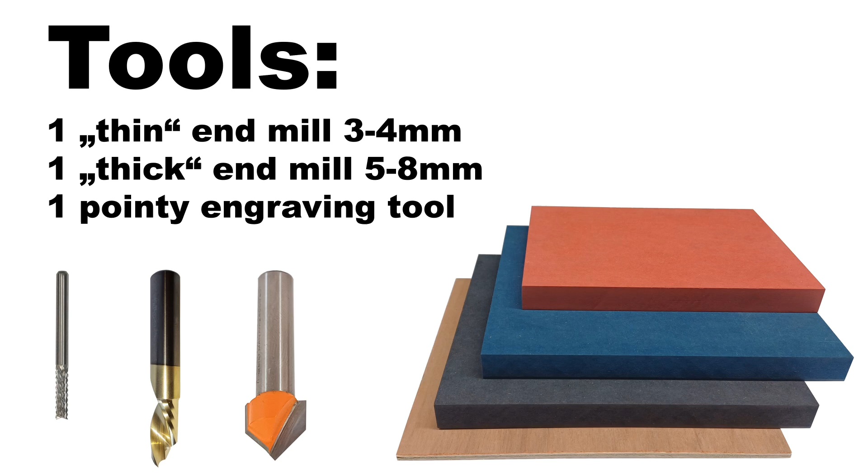Regarding end mills you need a thin one with about 3 to 4 mm diameter, a thicker one with about 5 to 8 mm, and a pointy engraving tool. The tool type isn't important for this project. And optionally, 8 magnets, 4 felt pads, sanding paper, superglue, paint and clear lacquer.

After downloading and extracting the zip file, we can get started. Start Estlcam, select menu File, Open, and open tokens.dxf. Estlcam will then ask about the length unit of this file, select millimeter and confirm. At the top you will find the tool list.

And before we can start, we first need to add the tool we are going to use to the list. At the moment there's only an example tool. We click on the empty line below to create a new tool and give it a name in the name column. I will call it Endmill 3.175 mm.

Actually you can choose whatever name you want, but it should make some sense to avoid confusion when we use more tools later. However, don't use brackets, they have a special meaning in Estlcam. If you like to know more about it, let the mouse rest at a header and Estlcam will display a tooltip with explanation. And with this, we will take a short detour to Estlcam's help function.

Estlcam is full of those tooltip windows that pop up if the mouse rests above something. This is Estlcam's main source of help and instruction and explains every function shortly but completely. Some also contain links to videos or websites offering further information. However, you need to keep Shift key pressed to be able to click those links. Otherwise the tooltip will avoid the mouse pointer and close itself before the link can be reached.

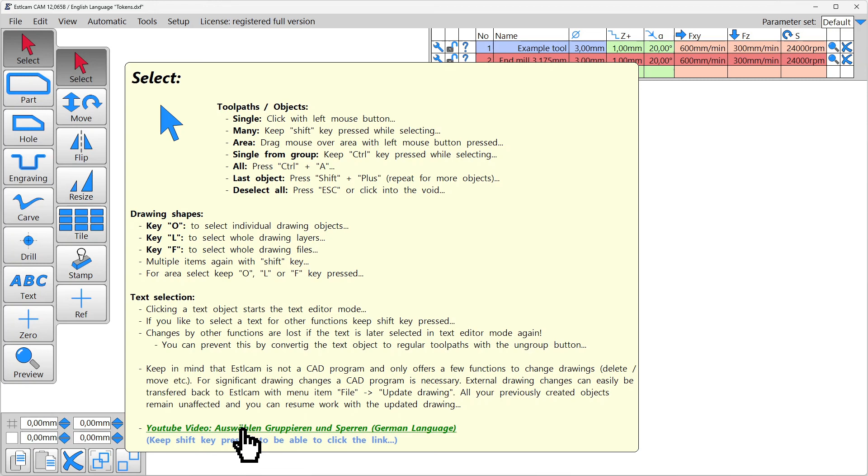It is a good idea to deliberately read a few of those tooltips every now and then. They contain many tips that will make work easier and cannot be found anywhere else. However, the tooltips get annoying over time. Click Menu Setup, Basic Settings, and check the Show help only if F1 key pressed option. Now the tooltips won't pop up automatically anymore, but you can still make them appear by pressing F1 key.

Okay, back to the tool list. Next to the name we enter tool diameter. Mine has 3.175 mm or 1/8 of an inch. It does not matter if we use a 3.0, 3 point whatever or 4 mm tool. But one tip for beginners, avoid very thin and very thick tools. 1 or 2 mm end mills break very easily, while 20 mm tools on the other hand are expensive and very destructive in case anything goes wrong.

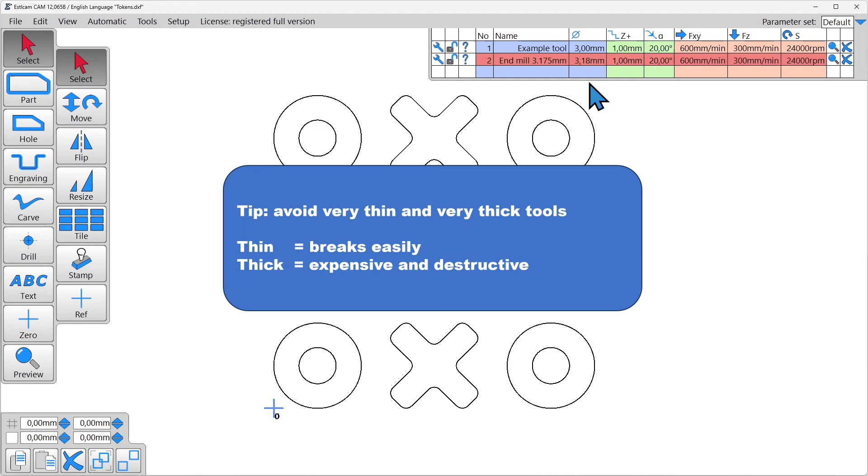The columns Z+, depth per pass, FXY, feed rate, FZ, plunge feed rate, and S, spindle speed, are generally referred to as cutting data. This is a topic we can only scratch at the surface. There are thick table books for reference, online calculators, and many tool manufacturers also provide guidelines for different materials.

And depending on tool and material, you will have more or less leeway regarding the cutting parameters. Some materials like for example aluminum or acrylic glass are very picky and can only be machined with very specific tools within very specific cutting conditions. Otherwise the tool will break or the cut quality is bad.

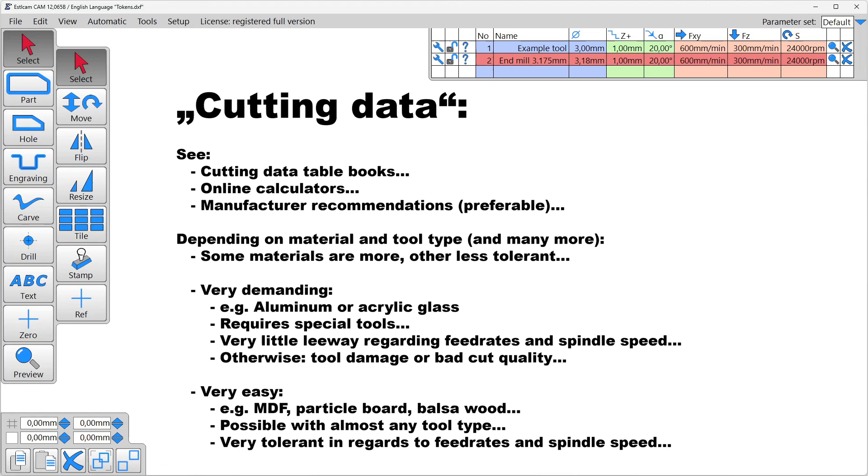Other materials like, for example, MDF or particle board are very tolerant and can be machined with almost any tool at mostly any feed rate or spindle speed. This is the reason why I've chosen MDF for our tutorial. It makes life easy. And this is the most important tip at the beginning: keep things simple and choose easy to machine materials so you don't have to worry about too many things at the same time. Okay, let's have a quick look at those 4 parameters.

Column Z plus, depth per pass. Our material has a thickness of 19 mm, and even though MDF is very easy to machine, the tool still would not survive if we try to cut 19 mm all at once. Instead, we will machine in multiple passes, and this value sets the maximum depth increment of each pass. I will use 3 mm. We could use significantly more, but I don't want to make it a challenge for weak machines.

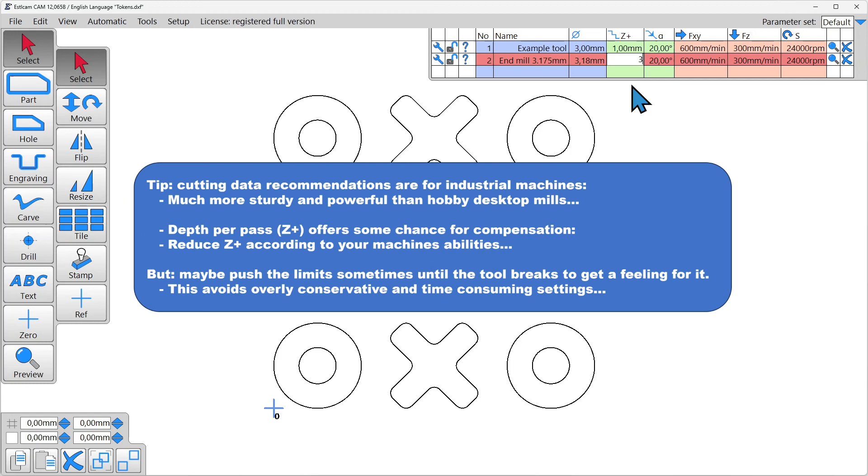And this is also a very important thing to know. Official cutting parameters assume a very sturdy and powerful industrial machine that cannot be compared to a hobby desktop mill. And depth per pass is the one parameter where you have the best chances of achieving some compensation by reducing the value to match the machine's abilities. But on the other side, a small end mill like this does not cost much. And sometimes it can be interesting and useful to intentionally push the values until the tool breaks, just to get a feeling for it and avoid overly conservative and time-consuming settings.

Column FXY is the feed rate, or the speed at which the tool travels through the material. For MDF it doesn't matter much if the machine travels at 100 or 5000 mm per minute. We mainly focus on what the machine can do without going anywhere near the limits. If you have no idea at the moment, just enter 500, but if you're sure your machine can do it, 3000 is also totally fine. Column FZ is the plunge feed rate, basically the same as regular feed rate, but for situations where the tool plunges deeper into the material. Many materials require reduced feed rates for this, but MDF doesn't care and we can use the same value.

Finally, spindle speed. I will enter 24,000, which is the maximum my spindle motor can do. This column is only relevant if you have an electronically controlled spindle motor. If your motor is controlled manually or has no speed control at all, this column can be ignored.

And one final thing about the tool list. It has 2 parts: the list view, giving you a quick but basic overview of all your tools, and a detail view for each tool that you can access by clicking the wrench symbol. Here we can customize many more properties, but for most simple projects the list view is just fine. But as we are already here, you can check the rounded holding tabs option, and then we close the window by clicking the OK button.

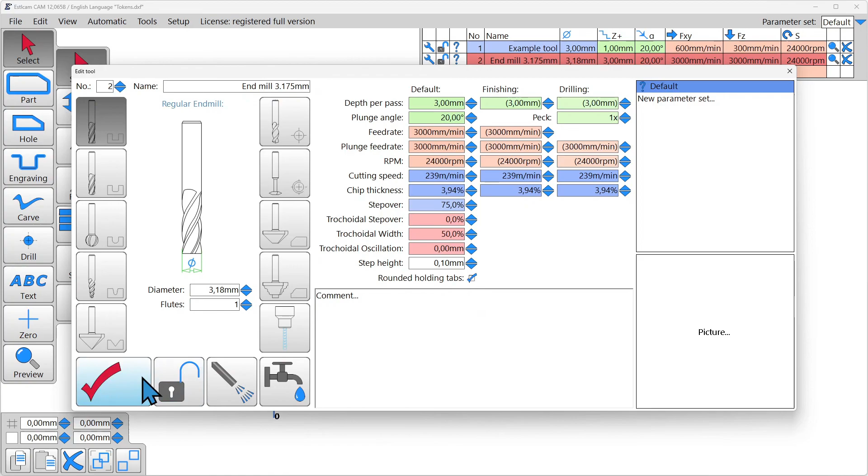Now let us have a quick look at the mouse functions. If you keep the right mouse button pressed, you can pan the view, the mouse wheel zooms, and a double click brings you back to a view where the whole drawing is visible.

Okay, our just created tool is highlighted red and therefore selected to create new objects. Now we enable the part function to create the outer shapes of our game tokens. As soon as the mouse pointer gets close to a drawing shape, it will be highlighted green. And when we click, the part function creates a new toolpath around the outside of our selected shape. The counterpart to this is the hole function, which can be used to create a new toolpath along the inside of a shape. Now we have created one X and one O, and we will ignore the other tokens for now, because we actually have a little problem that we should take care of first.

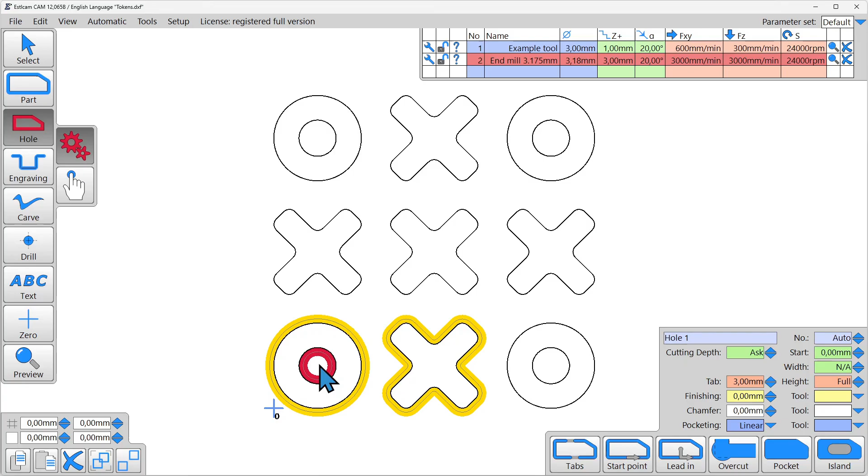If we machine our tokens this way, they will be cut out completely and just lay around loosely. Sounds good, but is bad. If we do it this way, the tool may catch the part and this can happen. If you're lucky, the part is just more or less damaged. If you're unlucky, the tool breaks. So machining the part completely is not a good idea if the workpiece is just held by clamps. There are alternatives like vacuum clamping or double-sided tape, but we will do something different.

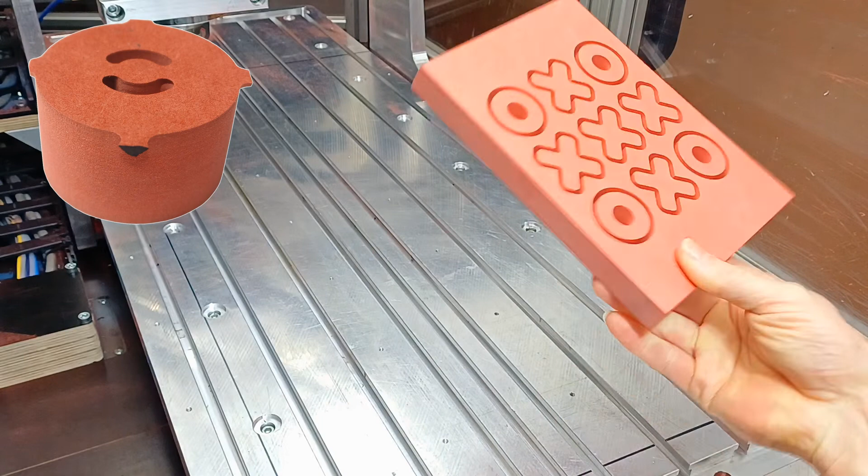We will keep the tokens connected to the board by small tabs. It adds some manual work at the end, as we need to cut those tabs and sand them down, but this is far better than risking damage to the tokens or tool. For this we select all objects we created so far: enable the select function, keep the left mouse button pressed and drag it over the parts. Alternatively, you can use the keyboard shortcut Ctrl A to select them all. Then we enable the tabs function and click where we want to create the holding tabs.

Here to the right in the Objects Properties section, we can adjust tab length in this field. Let's set it to 8. And tab height in the field right next to it. Let's set it to 4.

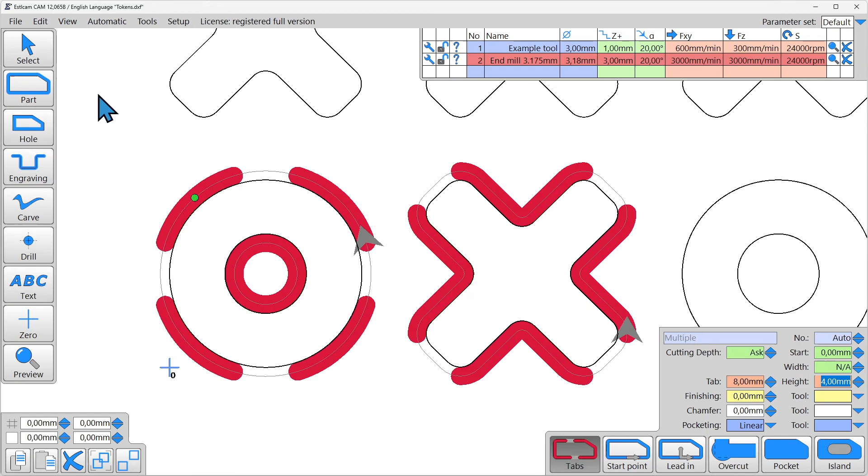The little piece inside the O can also cause trouble and jam the tool, but adding tabs here is a bit tedious. They would be rather hard to remove as everything is so tight here. So let's prevent this little pin altogether. Enable the select function again, click on the cutout and delete it by pressing the delete key. Then go to the drill button, enable helical drill and click the inside of the O again. Now the inside is cleared completely with no remaining pin to worry about.

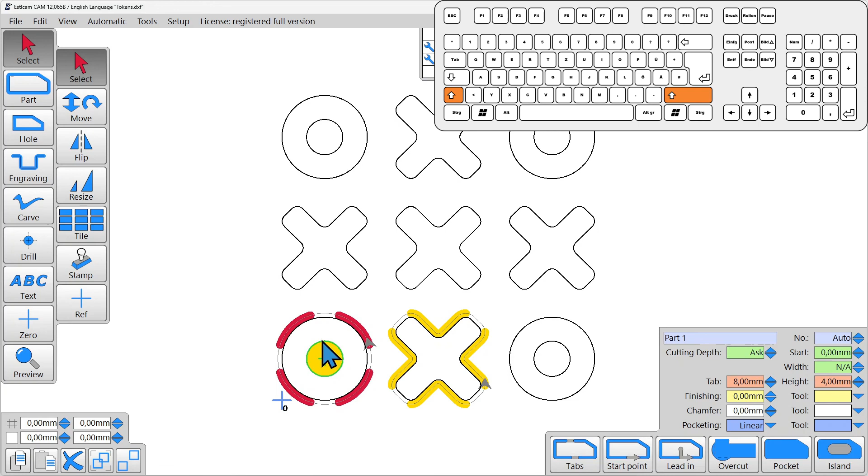Okay, now we have 7 more tokens and we could just repeat the previous steps, but I'm lazy and as the remaining parts are identical copies, we can use a shortcut. Enable the select function, keep shift key pressed for multi-selection and select the outer and inner toolpaths of our O. Then switch to the stamp function and just drop the O by clicking here, here and here. Then we go back to the select function, select the X, then again the stamp function and stamp it where we want it to be.

The tokens are finished, but one important thing still needs to be done. We need to select a workpiece 0. You can later fix the workpiece anywhere within the working area of the machine, but the machine has no eyes and you somehow need to show it where your workpiece actually is. For this we use the workpiece 0 point and it works this way. You select a distinctive feature of your workpiece. Very distinctive is the left front corner at the top of the workpiece.

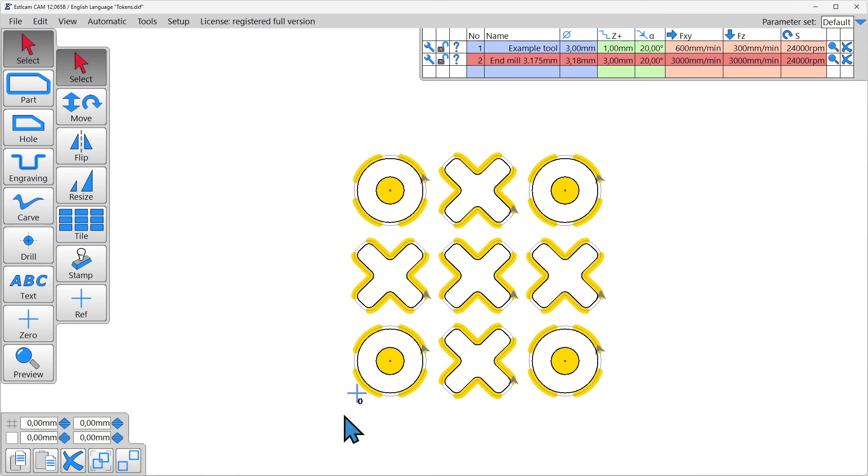The other corners are basically equally distinctive, but left front top is tradition, well visible from the front and suitable for most applications. And Estlcam offers special functions for this corner, so whenever possible you should choose the front left corner. And later we will just move the machine so the tool rests directly above this corner. And then we just tell the machine, now you are at workpiece 0, and so the machine knows where the workpiece is. The virtual counterpart of our corner in the CAM is the blue cross here. And this can be moved to whatever location you like with the 0 function.

Our board has a size of 200 by 150 mm. We enter those values in the workspace fields. And now Estlcam displays a rectangle of this size representing our board. Then we click the 0 function, click center, and now our blue 0 cross is set so that all of our tokens are perfectly centered inside the 200 by 150 mm board.

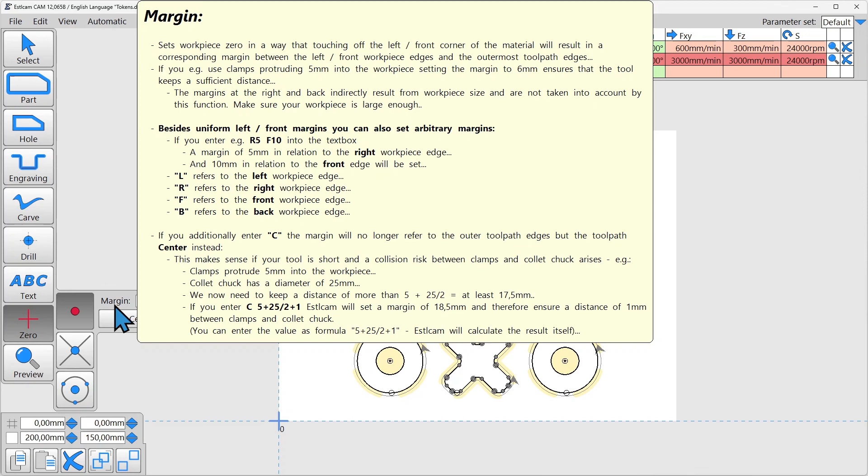Okay, now the CAM part of our tokens is finally finished and we can create a CNC program. Select menu File, Save CNC Program. If you do this for the first time, Estlcam will ask you about the control software you are using. Each controller has its own expectations regarding CNC programs, and this step is necessary so you get a compatible CNC program for your controller. If you have no controller yet, or just like to play around, select Estlcam Default and click OK. This dialog only appears once, and if you later like to change your preset, click menu Setup, CNC Programs, Post Processor.

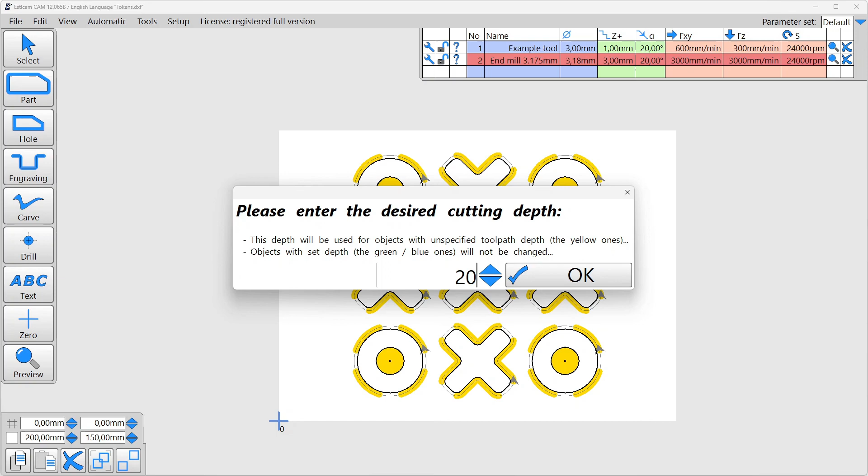Now you need to select where you'd like to save your CNC program. And finally, Estlcam will ask how deep you'd like to cut, because we never specified this. Our board is 19mm thick, but we will not use 19mm, but instead a little more, for example 20mm. This will ensure our workpiece is cut out completely, even if the material is a little thicker than expected, or the machine bed not perfectly leveled.

As soon as we click OK, Estlcam creates our CNC program and shows a preview. You can rotate the view by holding the left mouse button down, and double clicks will show the default views: top, ISO and side. There's also a simulation you can start here and accelerate or decelerate with the buttons right next to it. Then click OK and Estlcam closes the preview.

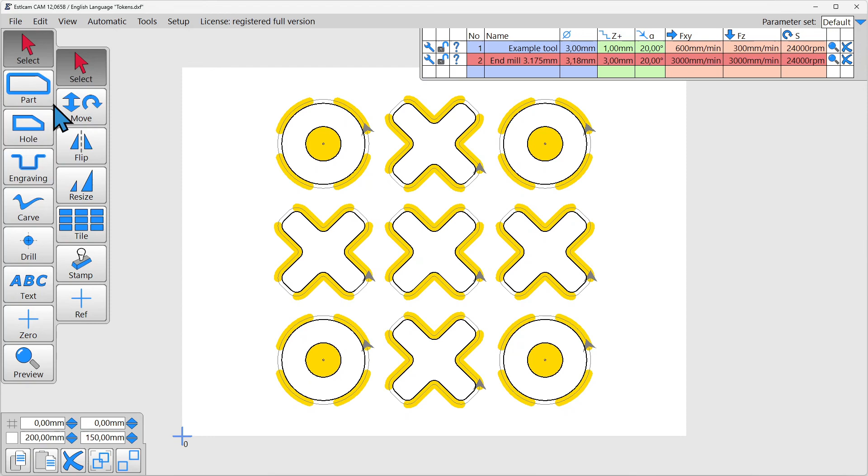One final thing before we go to the machine. We should also save our work as a project file using menu File, Save Project. The CNC program file we just created only contains the bare commands to control the machine, but no drawing, no tool definitions, and not the objects themselves with all their properties. This is only saved in the E12 project file, and if you later want to change something, you need the project file, do the changes, and then create a new updated CNC program from there.

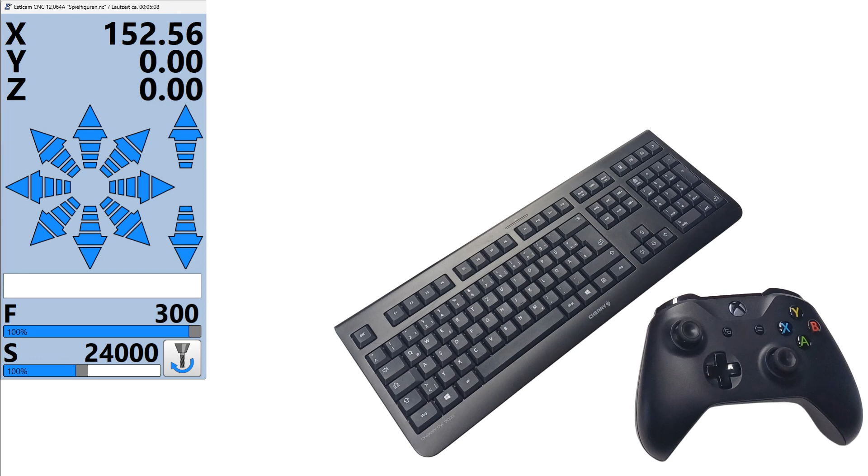You can control the machine with the mouse control cross, keyboard, gamepad, or handwheel. We won't go into details, but let's have a short look at each option. The arrows of the mouse control cross are split into segments to control the speed. If you click this arrow at the base, the machine will move slowly to the right. If you click it in the center, the machine will move at a medium speed. And if you click the tip, the machine will go as fast as possible.

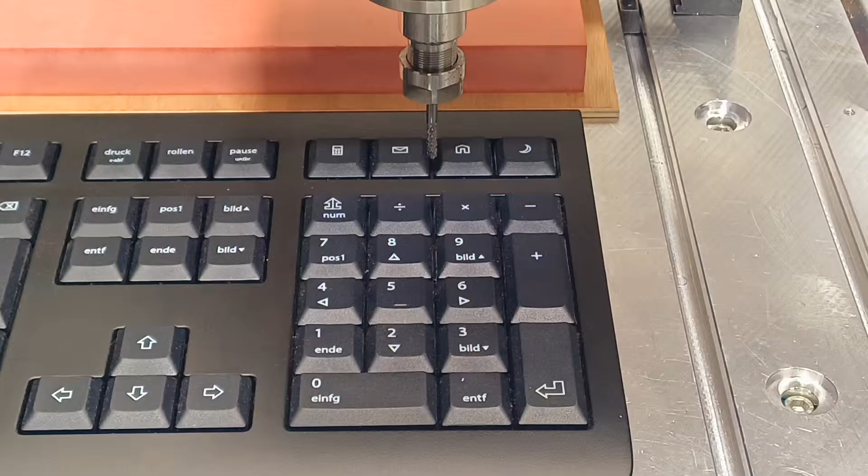Keyboard control is enabled and disabled by the keyboard button, or by pressing the num lock key. You can then control the machine with the number pad. The keys up here select the speed level: slow, medium, fast. Let's select medium. Left, right, to the back, to the front, up and down. Let's change to fast, and there we go. Tip: keyboard control is disabled automatically in some situations, for example if you enter a text or number field. This is necessary to prevent unintended movements when typing.

Gamepads are a really good option to control the machine. The right joystick controls X and Y, and the left one Z. The joysticks on their own are limited to a low speed range to allow for precise motions. For fast moves, you also need to keep one of the triggers pressed.

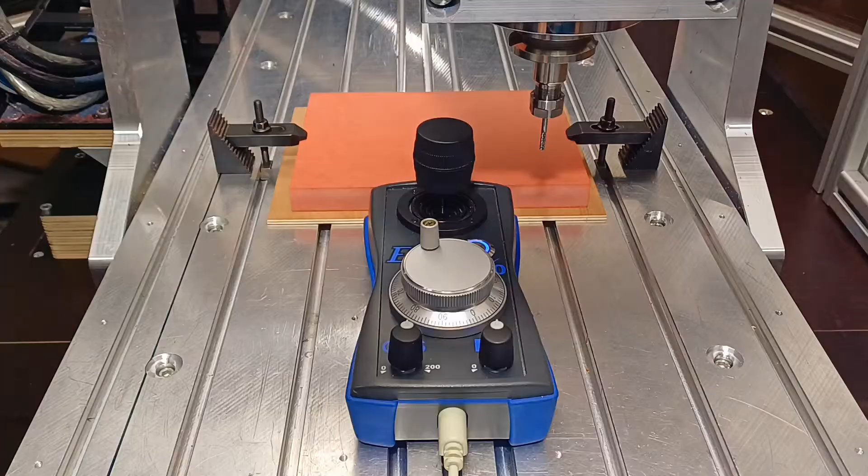And finally, the handwheel. The joystick controls all axes from very slow and precise up to full speed. The Z axis is moved by twisting the control stick. And the axis last moved by the joystick, or any other method, is then automatically connected to the handwheel encoder, which offers very precise control. The handwheel encoder is really great and useful to touch edges and surfaces without risk of overshooting and breaking the tool.

But Estlcam compatible handwheels are, to be honest, not exactly cheap and at least at the moment also hard to get. One alternative is the mouse wheel. The mouse wheel will also connect itself to the previously moved axis and also offers a sensitive and very controlled method of moving the machine. Tip: if the machine does not react to the mouse wheel, the mouse pointer is currently above a control with higher priority, for example a scroll bar. Make sure the mouse pointer rests at a neutral control, for example the preview area.

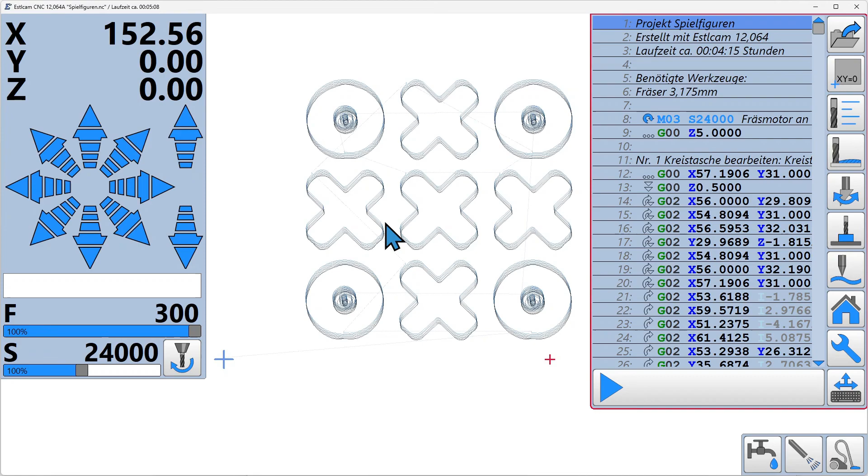Okay, now we can fix our workpiece on the machine, but don't forget to put a piece of scrap wood below it. We will machine 20 mm deep through just 19 mm thick material, and if there is no piece of scrap wood below the workpiece, the machine table will be damaged. It does not matter where you put the workpiece, as long as the tool is able to reach any location it needs to reach. Let us assume our tool can only move inside this line and is not able to go any further to the left or to the front.

Now, we obviously can't put our workpiece here, because our tool won't be able to machine in this area. But we also should keep at least half tool diameter distance to the line. It won't matter for this project, but in some cases the tool needs to be able to travel around the workpiece, and then the tool would need to go significantly further to the left than possible, even though the workpiece itself is still inside the work area. It can be useful to mark the limits of the working area with a pen.

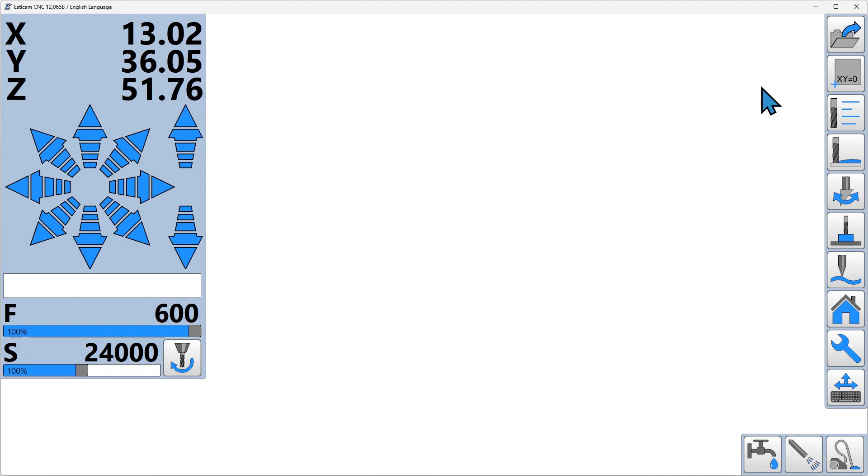Okay, we have a piece of scrap wood below the workpiece and it is tightly secured by two clamps. We open the CNC controller window, click the button at the top and open our CNC program. The list with the CNC commands can be resized with the mouse if necessary, and the preview in the CNC controller window behaves similar to the simulation. Double-clicking selects one of the default views, pressed left mouse button rotates the view freely, mouse wheel zooms, and right mouse button pans.

And now we determine our workpiece 0. For this we move the tool roughly centered above the left front corner, and then down until it touches the surface. Of course we have to be careful to avoid a hard hit to the surface, otherwise the tool may break. To avoid this, we first turn on the spindle motor by clicking the spindle motor button. A turning tool is much less likely to break than a still standing one. Then we move down until a short distance above the surface. And for the last bit, we use the mouse wheel or hand wheel encoder, which gives us perfect control.

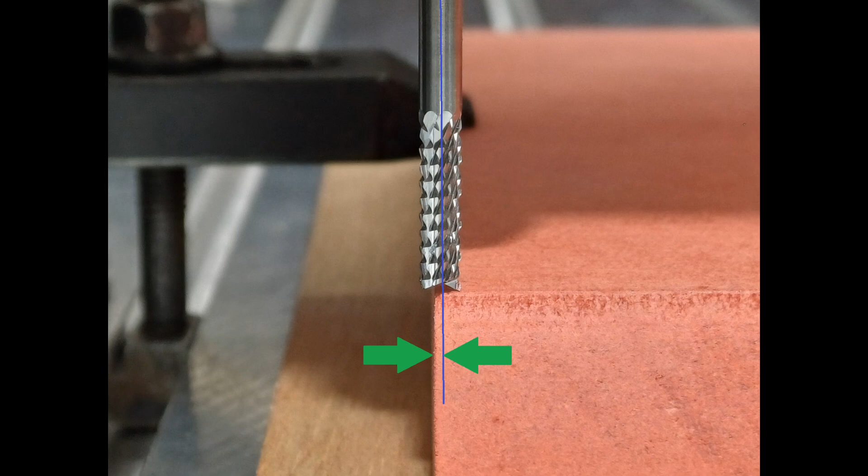Tip: once the tool touches the surface, the noise will change noticeably. I actually don't look much at all, instead I focus on the tone change to decide if the tool reached the surface. Let's listen again. This will scratch the workpiece a little, but it doesn't matter here as this area will be thrown away anyways. Okay, now we are at workpiece 0. When you look closely, you will notice that the tool is a little bit off-center to the right, but this is good enough for now. It will cause our figures to also be slightly offset to the right, but the precision of the figures themselves is not affected. Now we have to tell the machine that we are at workpiece 0.

To do this, we set all axes to 0. For this we have several options. We can click the field with the left mouse button and just enter 0. Or we can click with the right mouse button, in which case it will immediately jump to 0. There are also keyboard shortcuts, buttons on the gamepad and handwheel, and so on. Now the big moment has come, and we can start our first CNC program by pressing the play button.

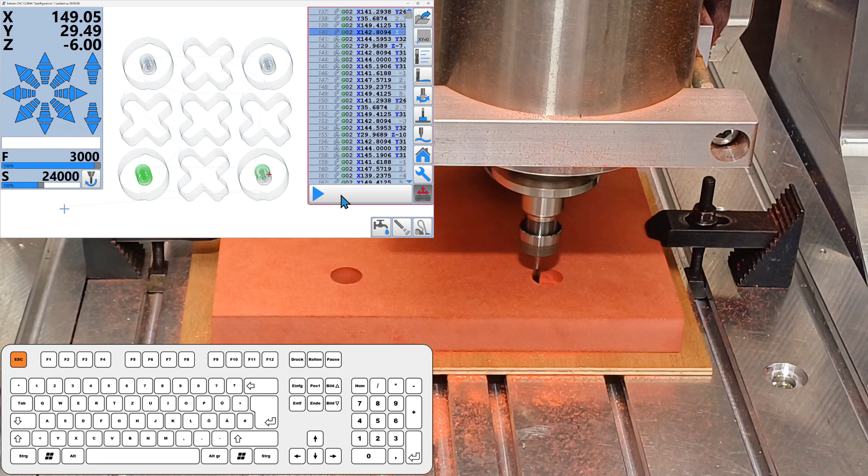We can also pause it at any time by clicking the button again or pressing the Escape key. Especially at the beginning, you should always have the Escape key in range. If something does not go as expected, just hit Escape and Estlcam will stop. While a CNC program is paused, you can move the machine manually to wherever you want. Estlcam will automatically return to the correct location. Let's assume I'm not sure if the clamps are tight enough. I have paused the CNC program. Then I move the machine up a bit and to the back so it is out of my way and I can tighten the clamps easily. And then, without any further ado, I can just click play again and Estlcam will resume work.

Okay, now that the machine is doing its job, one very important tip. Never ever leave your machine unattended. This is really important. If something goes wrong, for example a tool breaks, the remaining dull tool stump can quickly cause a fire due to friction. And this is just one of many things that can go wrong. Use the pause feature. A pause can be as long as you wish. You can even close Estlcam, turn off your computer and machine. The next day, or whenever, you can turn everything on again, start Estlcam and reload the CNC program. In this case, Estlcam will automatically ask you if you'd like to resume the CNC program where you stopped it. You don't even need to remember the line number. Estlcam will take care of it. All you need to do is press play again.

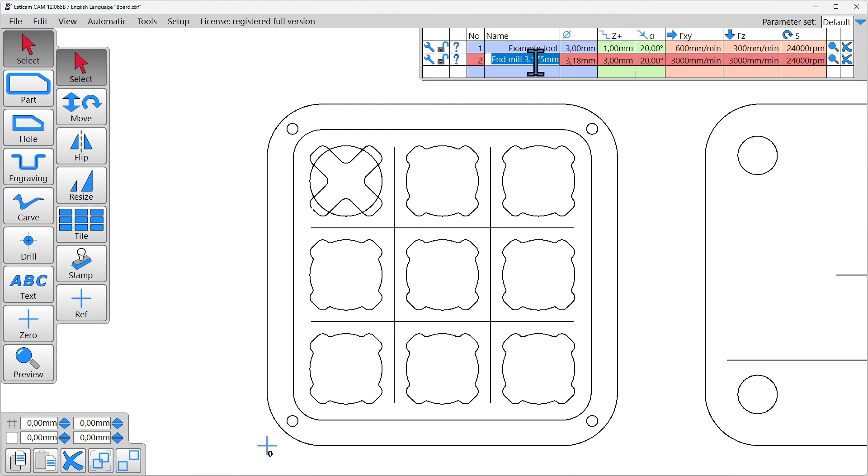Now we go back to the CAM to create the inside of our game board. Menu File, Open, Board DXF. Let's begin with the 9 slots for the tokens. However, the currently selected tool in the tool list is not our desired tool, but an example tool in the first row instead. We don't want to use this and therefore first click on our tool to select it again. Then we select the hole function and click the lower left slot.

Now a toolpath runs along the inside of the shape, but there's still a lot of material on the inside that needs to be removed. For this we click on the pocket button in the lower right corner and now everything inside the shape gets cleared too. Then we try the same with the slot at the upper left corner.

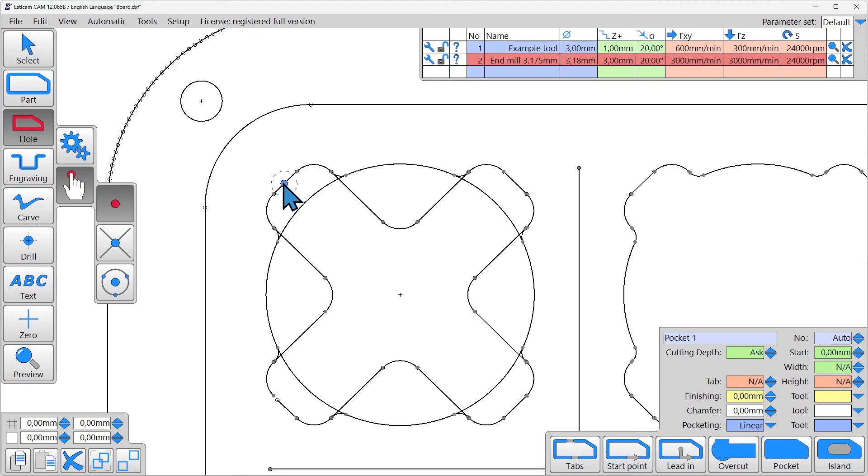Here we basically want the same, but no matter where we point the mouse, the desired shape never appears. The issue is caused by auxiliary lines from the construction that misguide the automatic shape detection. So we have to do this with manual shape detection. We click this button and then somewhere along the desired shape. If we now move the mouse, Estlcam will try to find a connection between the last point we clicked and the location the mouse now points to.

Let's move along this line up here. Looks fine. The green preview is following a section of the shape we want. So let's click and now this part is added to our shape. And from there we follow the shape further. This looks good, but once we get here, Estlcam takes a shortcut along the inner circle. We don't want that, so we go back a bit until everything looks fine again and click there. And so we click along the shape.

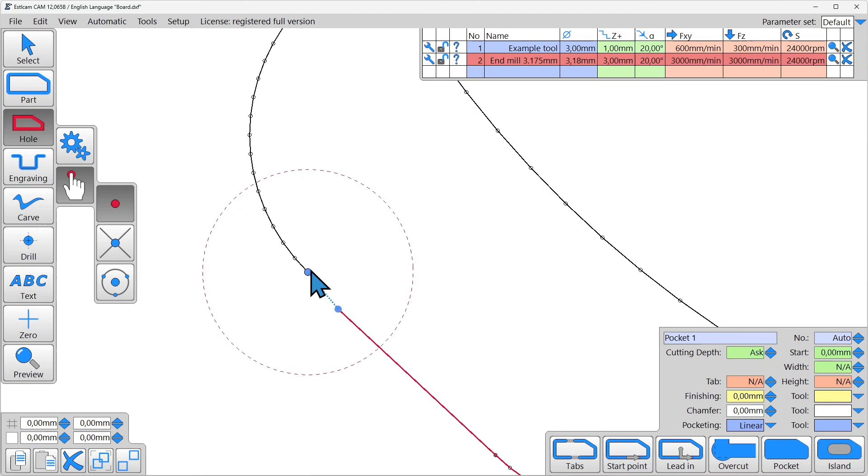Until here where we suddenly can't go any further. And if we take the mouse wheel to zoom in, the reason becomes clear. There is a gap. We point at the beginning of the gap, click, jump over the gap, click again. And now everything works normal again until we return to the starting point. There we click again and now we have a manually created toolpath. Tip: this function supports undo with the back key. Let's delete this and try again.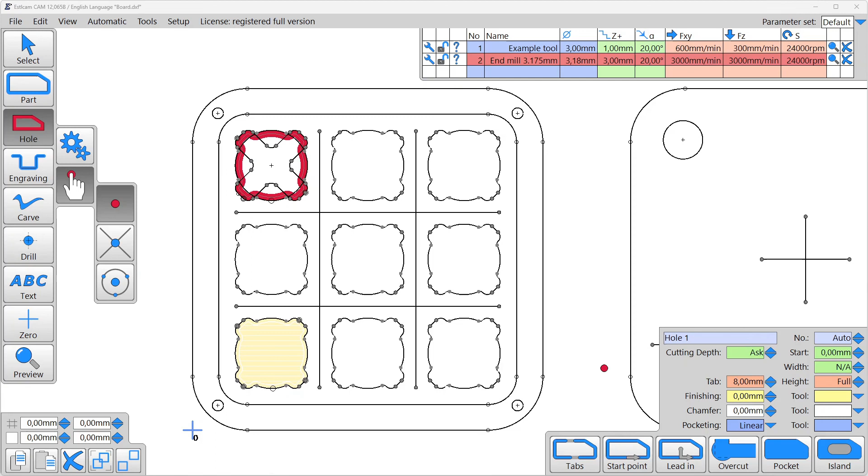Now I have made 2 mistakes and went along the inner shortcuts here. We press back key and again back key, and now we can continue. Okay, now we have this pocket 9 times in a nice rectangular pattern. And instead of creating it one by one, let's delete the upper one again and try the tile function instead. We enable the select function, select the pocket, switch to the tiling function, and now we want the pocket 3 times in X and 3 times in Y direction, at a distance of 44 mm.

OK, and done. And now we set a cutting depth for those 9 pockets. They should be 10.5 mm deep. And in contrast to our tokens where everything was at the same depth and we just told how deep we like to machine when creating the CNC program, we now have multiple depth levels and need to specify them explicitly. We select all 9 pockets, and when we enter 10.5 in the cutting depth field, this value will be set for all 9 pockets together. We don't need to do this one by one.

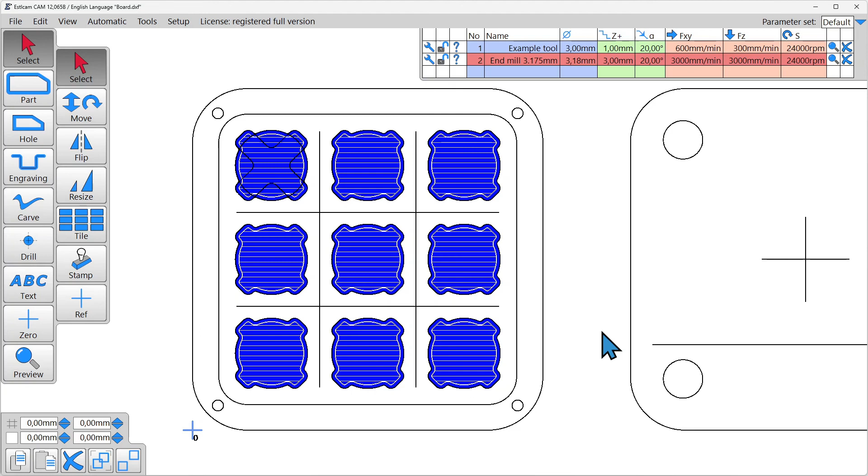And if we unselect everything by clicking in the void, our pockets are no longer yellow as before, but blue. Yellow is for objects with no specific depth value. Here you will be asked about it when creating the CNC program. And green and blue shades tell that the object has an explicit depth value. Okay, let's select all pockets again.

I have drawn them at exactly the same size as the tokens, and if we machine it this way, the slots may be a little bit too tight and the tokens won't fit. Let's zoom in here, and if we now set a negative value in the finishing field, the pocket gets larger. We get a little more space and the tokens fit easier. Let's use -0.3 mm. The finishing field usually has the opposite function to make things tighter at first, but we won't cover this now. Now we create this recess.

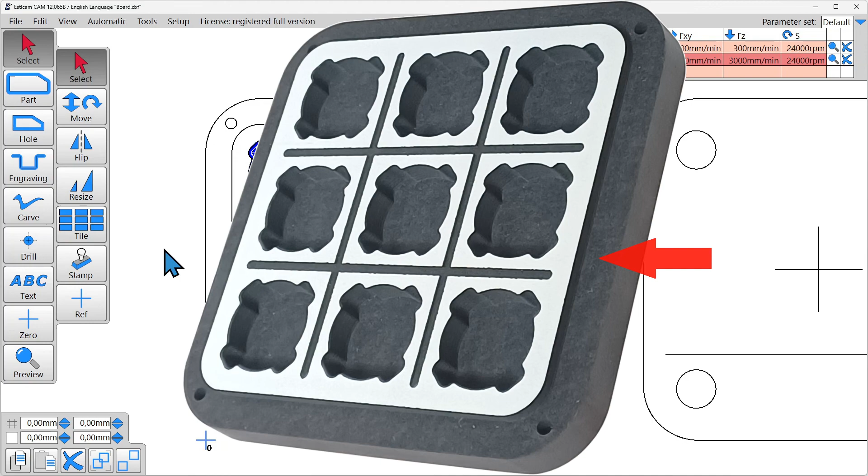For this we use the part function and click on the inner rectangle, and then the hole function and click on the outer rectangle. Now we have 2 tool passes creating an inner and outer boundary for our recess, but in between is still a lot of material left. To get rid of it, we select both tool passes and click on the island button.

Now everything between the outer and inner boundary is cleared too, but the area at the inside remains standing as island. Okay, we set a cutting depth of 5 mm. And then we take care of those 4 holes we later use for magnets to keep the lid on. We create them with the helical drill function,

switch to the select function, select them all while holding Shift key, and then we have to think about the correct cutting depths. The magnets are 10 mm long, so we need 10 mm deep holes, and therefore we enter 10 mm in the cutting depth field. But the holes are not at the surface, they are at the bottom of our 5 mm recess instead. And therefore we need to set a starting depth of 5 mm in the field right next to it. Otherwise the drill holes will not be deep enough.

Okay, here we have 4 lines we like to engrave. We select the engraving function and just click the lines. Select them with Shift key pressed and set a cutting depth of 1 mm. Then we need to machine the board itself, function part, cutting depth 20 mm to again make sure everything is cut out completely, function tabs, place 4 of them, again 8 mm long and 4 mm high.

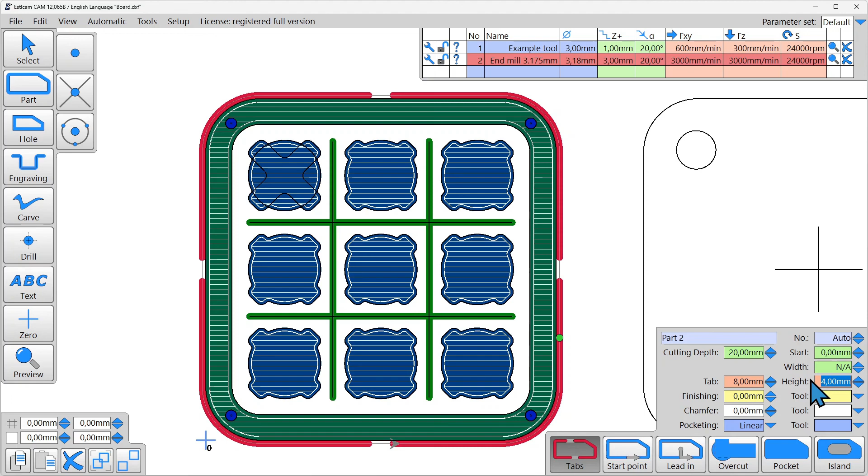Almost finished. The only thing missing is workpiece 0. We again set board size here, this time 220 by 200 mm, function 0, center, and finished. We save a project file, let's call it board inside, and then create the CNC program.

Okay, back to the machine. The board is again fixed with a piece of scrap wood below it. And to make things pretty and get a nice contrast, I've painted it white. Now we could eyeball workpiece 0 like we did before, and this would be totally fine, but we are here to learn and can do it more precisely.

Behind the X, Y is 0 button, you will find several functions that help you find workpiece 0. And we will use the first one, touch off X, Y, Z. It asks for tool diameter, so we enter 3.175, and a thickness, which we will leave at 0.

Now we turn the spindle motor on, move the machine to the left next to the workpiece and down. Then carefully to the right until the end mill slightly touches the left edge. Again, we mainly focus on the tone change and not so much on looking. And then we click this button to tell Estlcam that our tool now touches the left edge.

And this will make the x-axis change to -1.59, because the tool is currently not directly centered at workpiece 0, but instead half tool diameter offset to the left. Then we repeat this for the y-axis. We move in front of our workpiece and then back until we slightly touch the front edge.

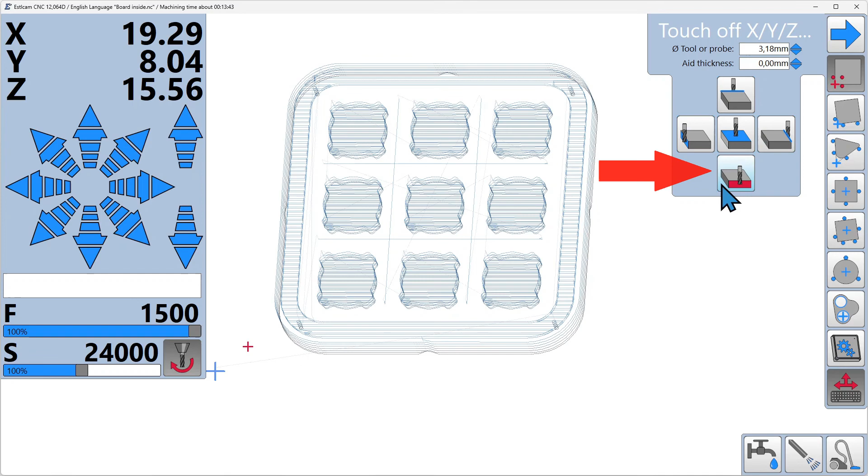Now we could press this button, or alternatively use the keyboard shortcut, right Gamepad bumper or Handwheel OK button. In this case, Estlcam recognizes the correct edge automatically by checking the direction of the last machine movement.

Then we move up a bit to the inside and down until we touch the surface to determine Z-axis 0. We again press the button and return to the CNC program by clicking the return button. And now we have a precise 0 for all axes.

Even though the machine is currently not resting directly at workpiece 0, we could start a CNC program here immediately. It makes no difference. But on the other hand, it doesn't hurt to verify everything is fine by first moving the machine to workpiece 0. We move up a little so the tool does not scrape over the surface, and enter X, Y in the command line to move the machine to X, Y, 0.

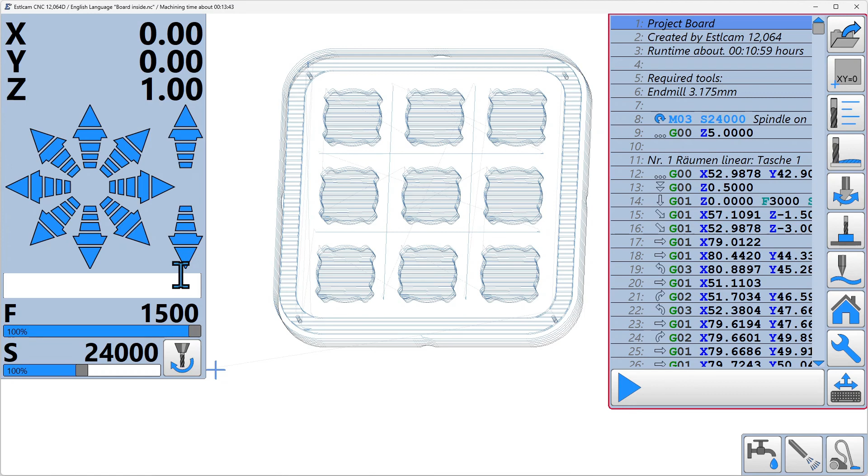And then, for example, AZ1 to move down until 1 mm above the surface. And again, my favorite hint, have a look at the tooltips. They also explain the commands you can use in the command line. Okay, looks fine. Let's start a CNC program.

So, let's assume the tool broke and the machine is now cutting in the air. What to do? We pause the CNC program, move the machine upwards, then we check the workpiece if there are any remains of the old tool stuck somewhere. You have to remove them because they would destroy the new tool once it comes along. Then we replace the broken tool.

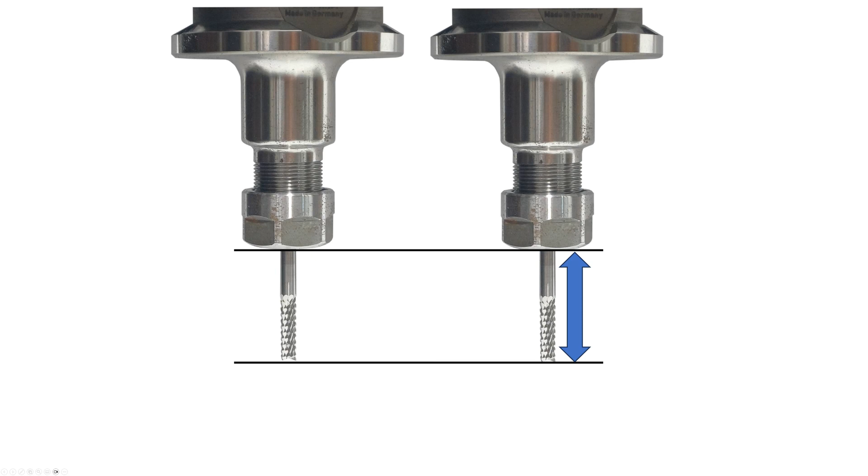Our new tool will now most likely stick out of the collet a little more or less than the old one. This means, before we can continue, we have to zero the Z-axis again. We move the tool down somewhere until it touches the surface and then set Z to 0 again. X and Y do not change.

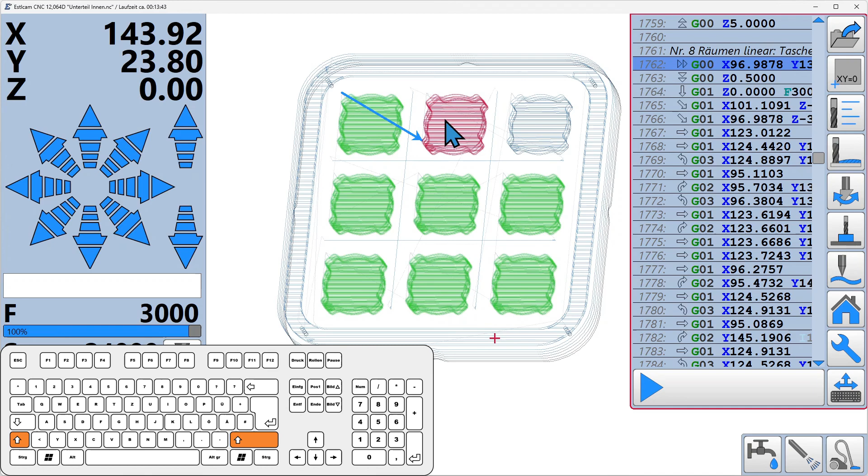We don't have to repeat the complete CNC program, but obviously need to jump back to somewhere before the tool broke. It happened at the center pocket, and now we just keep Shift key pressed and click on this pocket. It will now be highlighted red, and Estlcam automatically jumps to the beginning of this pocket. And now we just need to hit play again, and Estlcam resumes work.

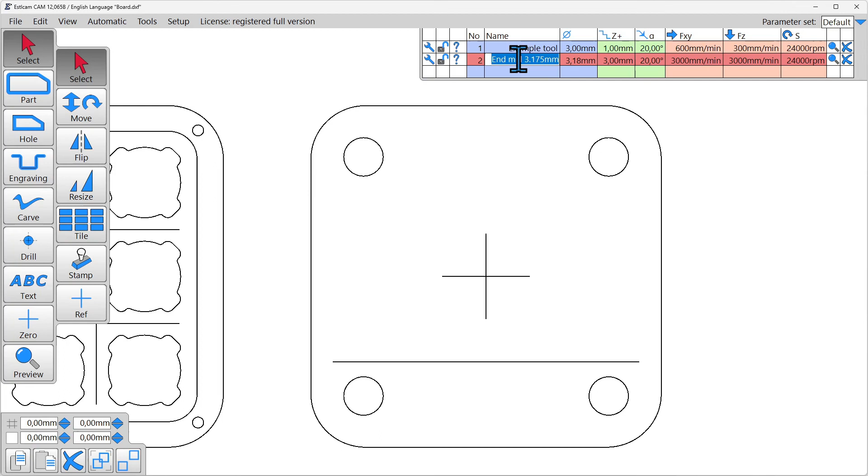Okay, back to the CAM. Let's create the outside of the board. Menu File, Open, Board DXF. We select end mill 3.175mm in the tool list again. Here we have 4 shallow holes for felt pads. We activate the helical drill function, click on the circles, then switch to the select function and select them all, and set cutting depths to 1mm.

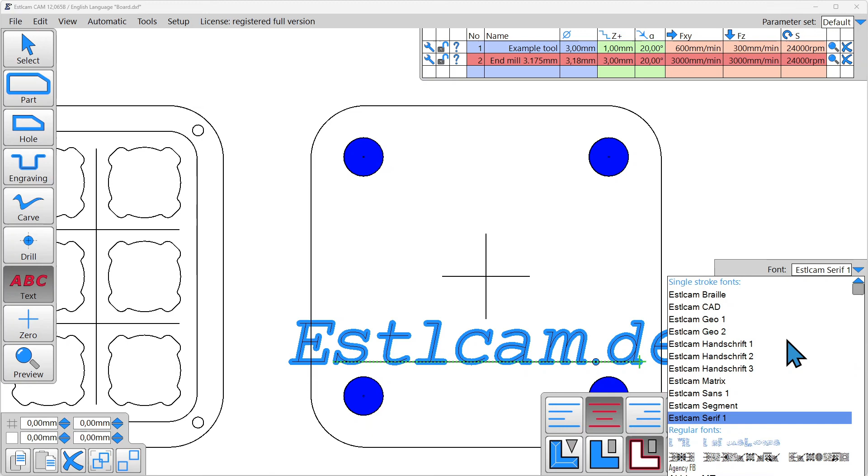Then we enable the text function, click this line at its left end so the green arrow points to the right. This is important as otherwise the text will be upside down and run in the wrong direction. I want to do some advertising for Estlcam, so let's type Estlcam DE. Make it a little larger, for example 18mm. Center. Italic also looks good. And as font we use, let's see, Estlcam Geo 1. Depth 1mm is fine. Click OK, and the text is finished.

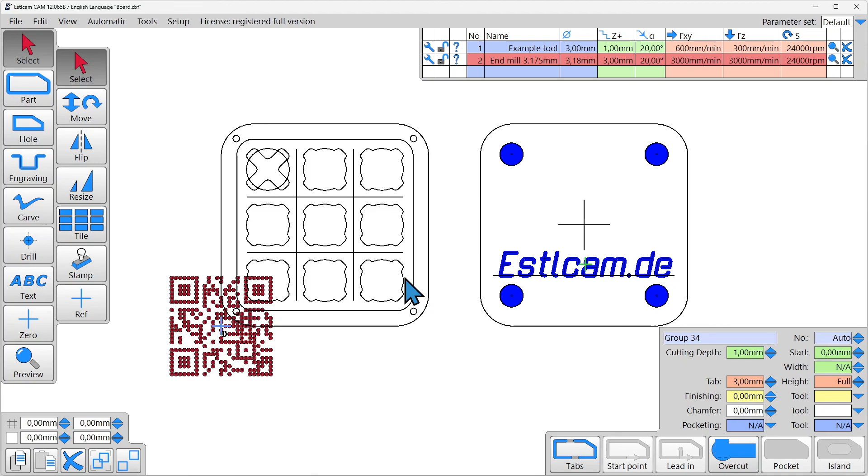Then I would like to add a QR code for my homepage. Menu File, Open, QR Estlcam PNG. Now this window will appear, and there we select the first button for the QR code function. We leave everything at default values. OK. And now we have our QR code, but at a totally unsuitable location. It is already selected. We enable the move function and drag it to the desired location. OK, it snaps nicely to the center marker here. I want it a little higher. Looks fine.

Now to workpiece 0. We want something distinctive like a sharp corner, but here everything is well rounded. However, the corners actually do still exist as intersection of the edges. And we can take advantage of this both here in the CAM as well as later on the machine. We select the 0 function, enable the intersection function right next to it, and select the left and front edge of our workpiece. And now we again have an absolutely clear workpiece 0 at the left front corner. We save the project as board outside and create our CNC program.

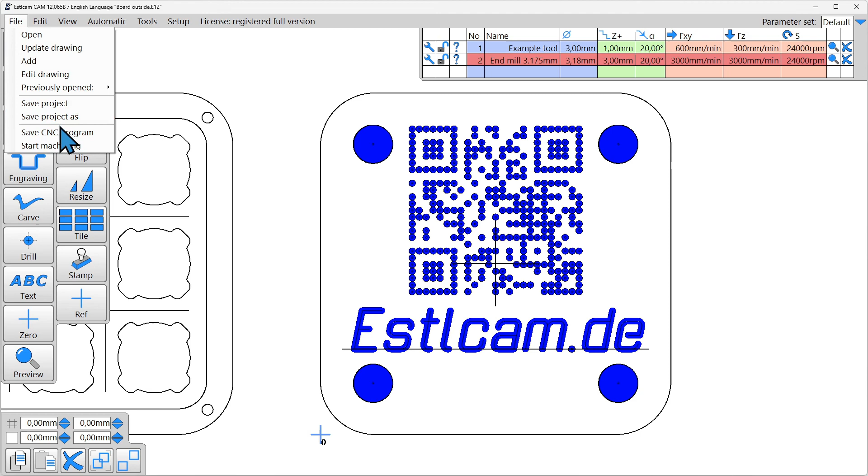Okay, now we machine the other side of an already semi-finished part. Here we should consider 3 things. Workpiece 0 needs to be precise, otherwise the result is displaced and looks uneven. Then we don't want scratches on the finished part, so touching the workpiece with the tool running should be avoided. And now it is also important that our workpiece is aligned exactly parallel to the machine axis, otherwise the result is twisted.

Yet, I don't take any care at all to align the workpiece properly, and intentionally fix it at a well-visible angle. Instead of wasting time aligning the workpiece, we again go to the touch off functions and select the corner with angle compensation function. Estlcam again wants to know our tool diameter, and for aid thickness we enter 0.1mm, which is roughly the thickness of a piece of paper.

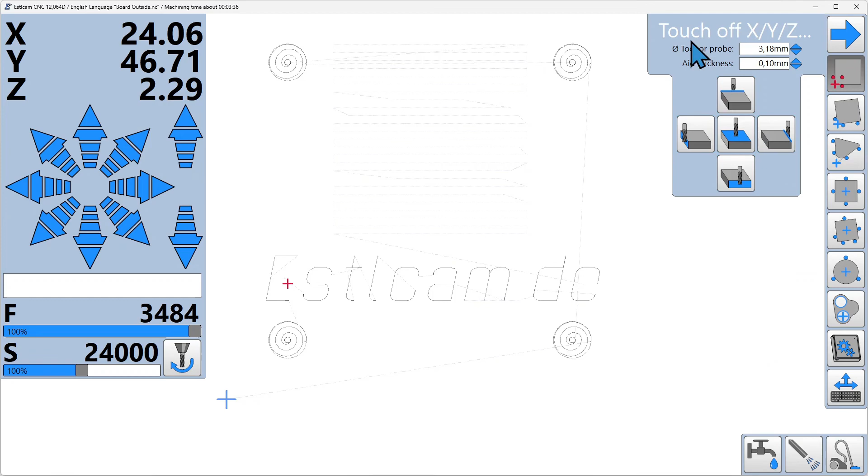We begin by zeroing the Z-axis. This is an optional step for this function. You can do it here, and it also makes sense to do it here, but you don't have to and can instead also use the touch off XYZ function later. We move above the workpiece and carefully down on the surface, while holding and wiggling a piece of paper between tool and workpiece. Once we feel the paper is stuck, we click the Save Point button. And with this, the Z-axis jumps to 0.1, as we are not standing directly on top of the surface, but instead on the piece of paper.

And then we get to the actual function, for which we need to touch 3 points along the left and front edge of our workpiece. 2 preferably far spaced points along the longer edge, and 1 point along the shorter edge. Here all edges are equally long, so it doesn't matter at which we measure 2 points. I will measure 1 on the left and 2 at the front. We move to the left next to the workpiece and a bit down, carefully against the left edge, until our piece of paper is stuck again.

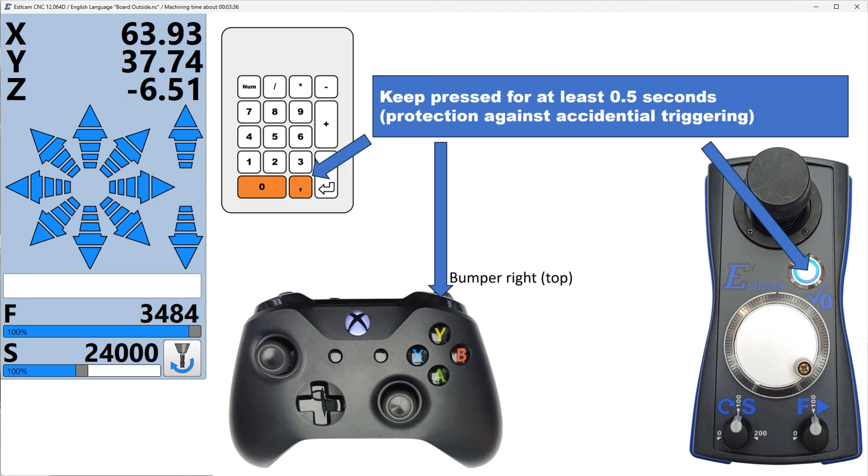And click the Save Point button to confirm the measurement. Or alternatively, press the keyboard shortcut, right gamepad bumper or OK button on the handwheel. Then we move in front of our workpiece in the area of the left end of the front edge, back until the paper is stuck, and save our second measurement.

Finally, we move to the right end of the front edge and measure the third point. Estlcam has now adjusted X and Y, so workpiece 0 is exactly in our desired corner and reports the angle it measured. And in the preview, you also see that now our CNC program is no longer straight and turned exactly the same way as our workpiece.

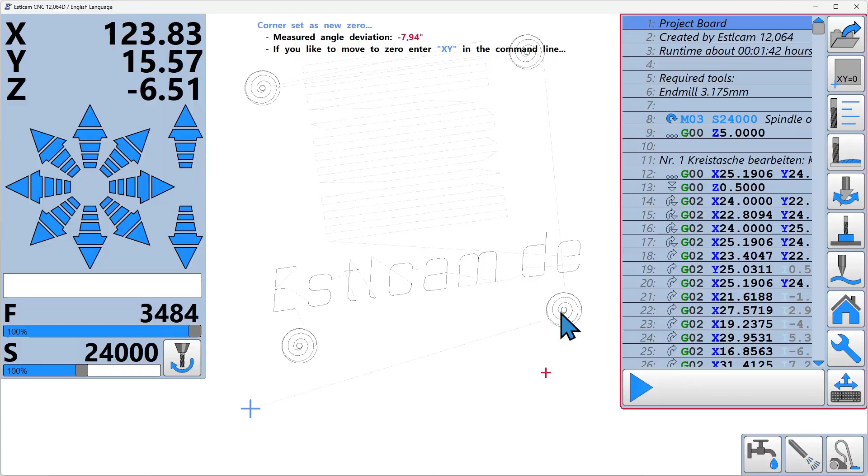Tip: make sure to move at least the last millimeter before touching an edge at a more or less right angle towards it. Estlcam checks the travel direction of the last millimeter to decide which edge was meant. If we, for example, travel towards a left edge in this way, it would be misinterpreted as front edge because the direction of the movement pointed mainly to the back, and the result will be wrong.

Okay, we determined our workpiece 0. We could go there again to check, but I skip it this time and start the CNC program directly.

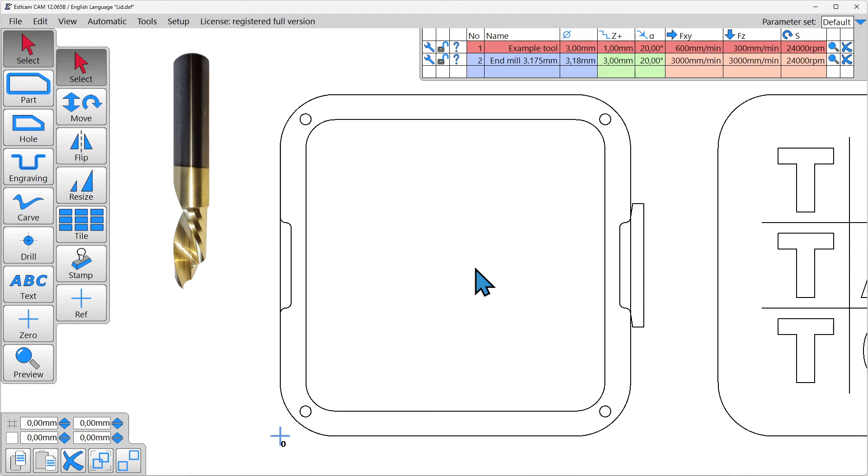Next, we create the inside of our lid. Menu File, Open, Lid DXF. There we have a huge pocket, and to save machining time and show you how tool changes work, we will do this with a thicker tool. I will use one with 8mm diameter. 8mm can be a bit much for some machines and may not even fit the collet. If this is the case for you, just use something smaller.

To create the tool, we again click the empty line at the bottom of the tool list. Name: End Mill 8.0mm. Diameter: 8mm. And for depth per pass I will use 8mm too, but if your machine is a bit on the weak side, maybe start with 3mm first. And for the rest we will just use the same as for our thinner tool. Okay. The new tool is highlighted red and therefore selected.

Function Hole, select the inner rectangle, make a pocket and enter a depth of 14mm. Then we have 4 drill holes for our magnets. Function Drill, Helical drill, click the circle, and Estlcam starts complaining because I have tried to machine a 5mm bore with an 8mm tool, which is not a good idea.

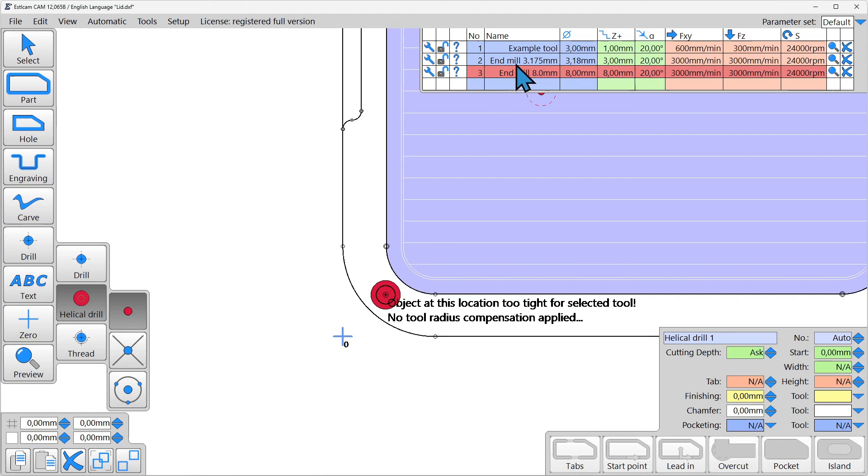We have to machine this hole with the thin 3.175mm tool again, so we just click on it in the tool list. And now Estlcam asks us if this tool change should already apply for the currently selected helical drill or only for future new objects. We want to change it for the helical drill too and click Yes. Now the bore diameter is okay and Estlcam stopped complaining. And this way we can create the remaining 3 holes too.

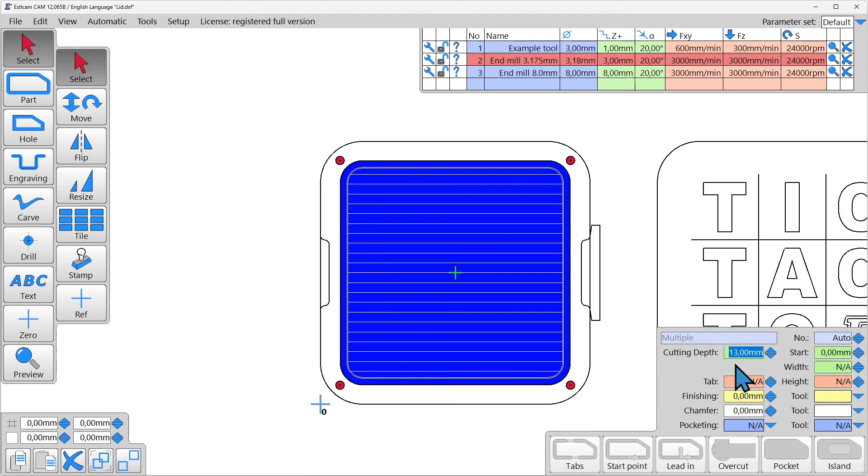Back to the select function, keep Shift key pressed and select the 4 drill holes. For cutting depths we enter 13mm. This is intentionally 3mm too deep as the magnets are quite strong and would otherwise make it hard to open the lid.

Now to the dimples left and right. We enable the hole function, and if we click here, it doesn't look too bad at first. But there is still material left in the transition radius that shouldn't be there. To clear this area, the tool would need to be able to travel further to the left, but couldn't as this line prevents it from doing so. So we need a shape that provides our tool with more space to the outside. And such a shape can be found on the right side.

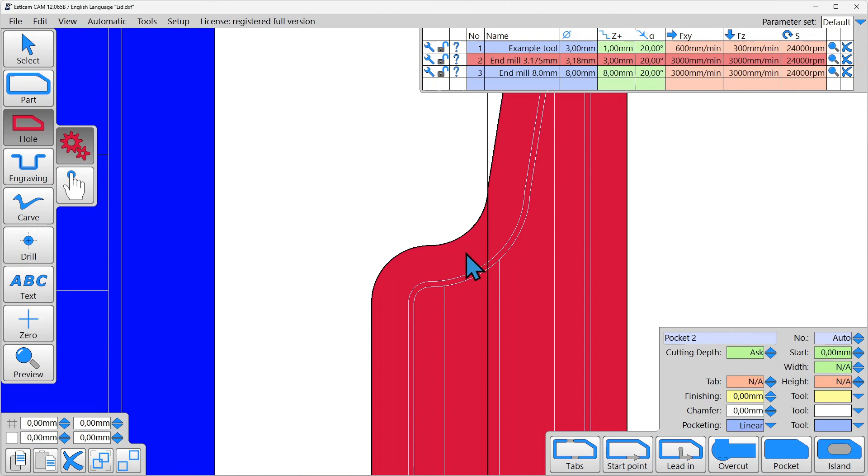If we select this with the hole function and make it a pocket, then the transition radius is cleared properly as well. This causes additional material to be removed outside the part, but it doesn't matter as this area will be thrown away anyways. We can do the same on the left side manually. Here we select and delete the undesired hole, and this time we use the manual shape detection.

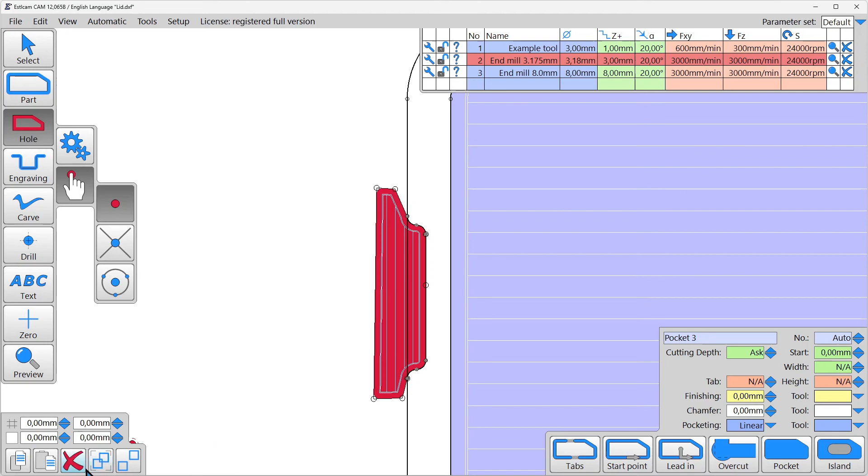Start somewhere here on the inside and follow the shape to the end of the transition radius. Then we go to the outside, left, up, right, back on the transition radius, and the remaining way to our starting point. Pocket, and now we get the same result as on the right side. A bit skewed here, but it will do the job just fine. But I delete it anyways and enable a 1x1mm grid down here. Then we can do it again, but this time a bit more tidy.

So there are two options. You can already consider situations like this when drawing and add suitable auxiliary shapes like the one on the right side, or improvise with manual shape detection. I prefer proper auxiliary shapes in the drawing, and if one got forgotten, we can make up for it at

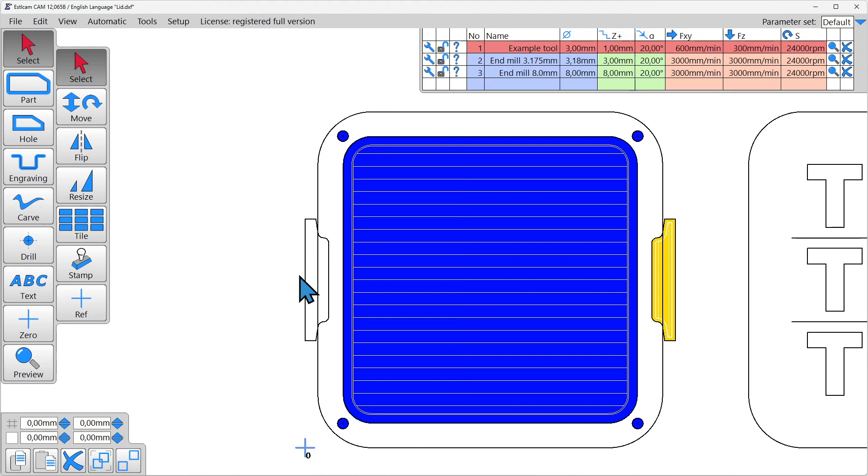any time. So I delete this again, open the drawing in LibreCAD, mirror the auxiliary shape to the left, and save the file again. Then I select Menu File, Update Drawing, lid.dxf is already selected, and OK. And with this, the drawing is up to date in Estlcam. And unlike opening a drawing with Menu File, Open, the update function keeps all the objects we already created.

Then we create the dimple once again, make it a pocket, switch to the select function, keep Shift key pressed, select the counterpart on the right side too, and set cutting depth to 14mm. Finally, the part itself, function part, 20mm deep, and add a few tabs.

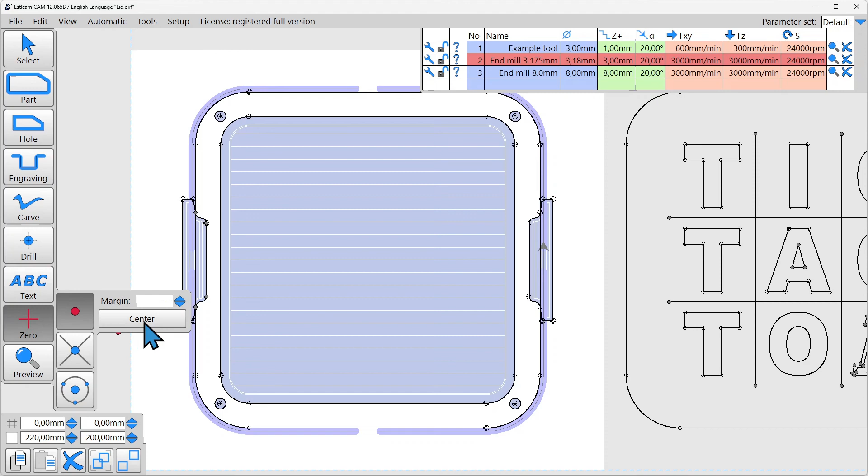And for workpiece 0, we again use the center function. Then we save the project as lid and create our CNC program. Okay, now we have a CNC program with a tool change. First we take a look at the beginning of our program to check which tool we need first. Here we find required tools End mill 8.0mm and End mill 3.175mm.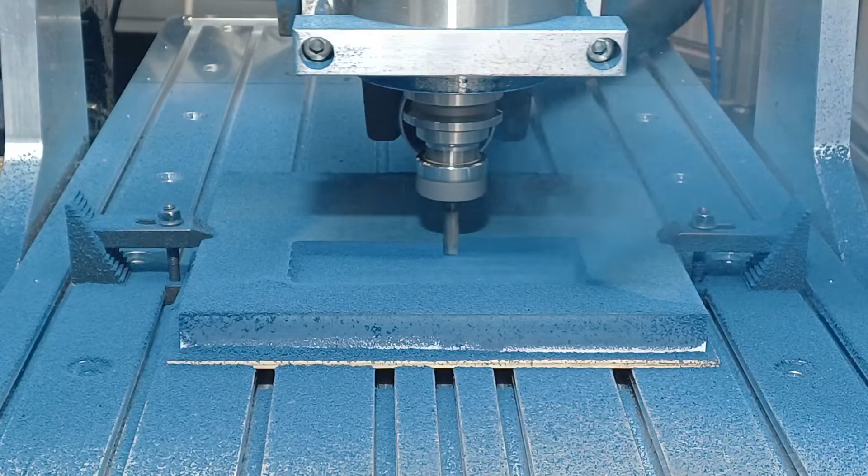End mill 8mm is first, we insert it and use it to determine workpiece 0. I won't show this again, you already know how it works. Then we start our CNC program and just let it run. Estlcam is now milling the large pocket, and once finished it will automatically pause the CNC program and display a message up here that End mill 3.175mm is now required. Move the machine to any convenient position and insert End mill 3.175mm.

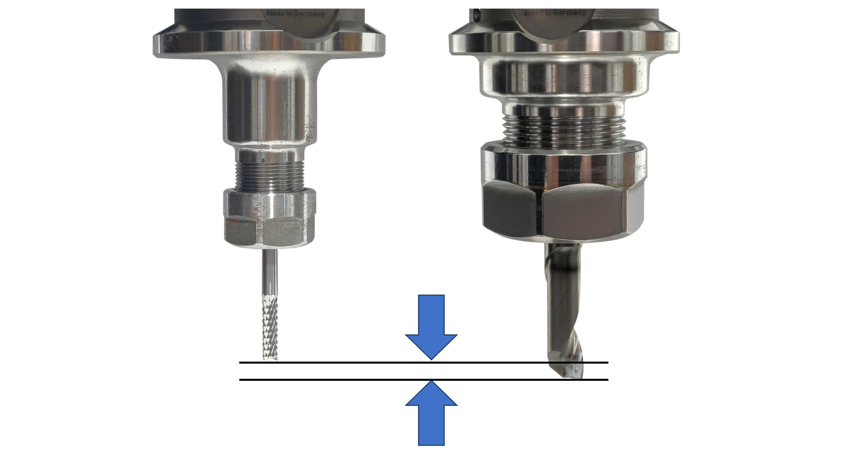This will now most likely have a different length than our 8mm tool, and therefore we need to zero the Z-axis again. For this we just move above the workpiece, down until the tool touches, and set Z to 0. That's all. Click play again and Estlcam will complete the workpiece.

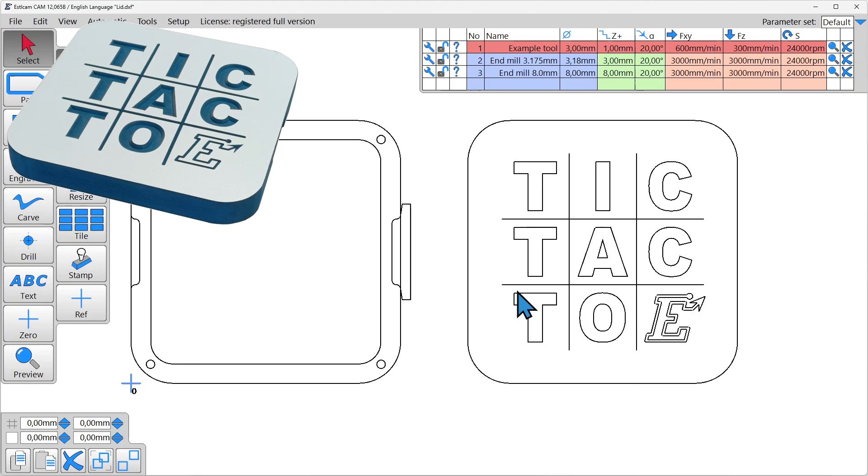Okay, back to the CAM for the last time. We again open lid DXF. Here I like to create Tic Tac Toe and the Estlcam logo with a pointy engraving tool. The advantage of a pointy tool is that it makes fine details and sharp corners possible. For example, this corner in the letter A, at the left a nice sharp corner made with the engraving tool, and at the right visibly rounded with the 3.175mm tool.

And the logo wouldn't be possible with the 3.175mm end mill at all, it is far too thick for this. This would only work with a tool diameter of 1.5mm or less, and even then the tip of the arrow is significantly deviating from what we want. So we need to create another tool. I call it carving bit 12.7mm, diameter 12.7, and for the cutting data we just use the same as for our 3.175mm end mill.

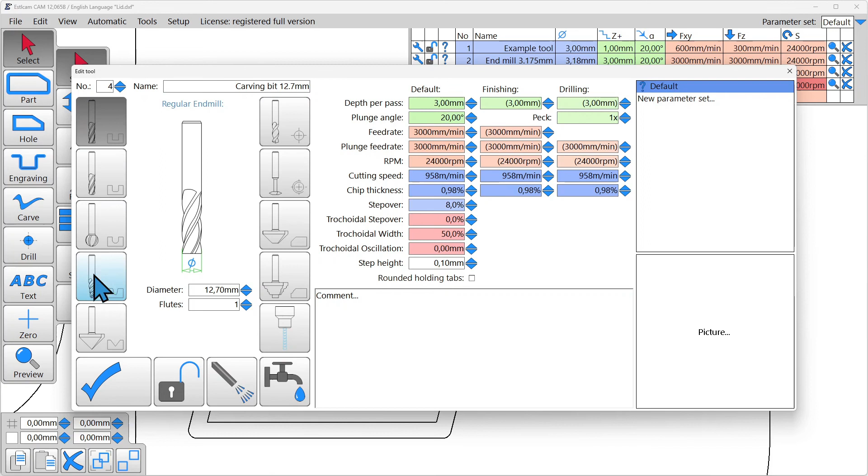Then we click the wrench symbol, as the tool shape can only be set in the tool list detail view. Here we select engraving tool and enter tooltip angle, mine has 90 degrees. Then we close the window. Our tool is again highlighted red and selected. We enable the carve function and click on the letters and logo.

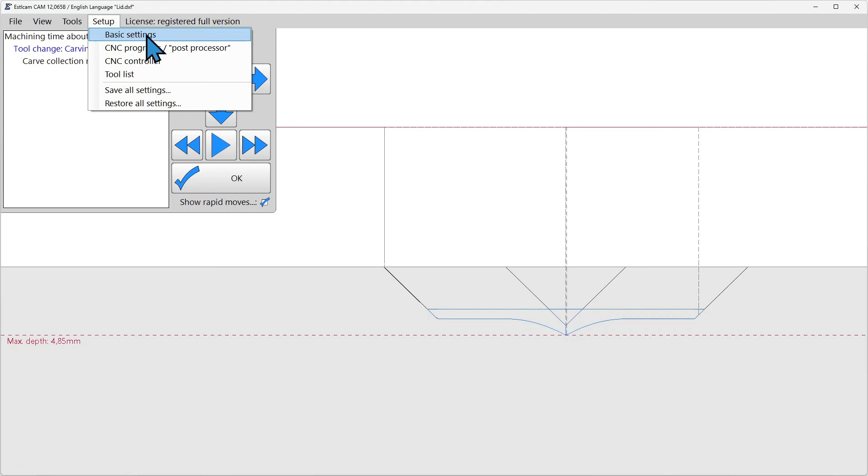Now let's have a look at a preview. Here we select the side view by double-clicking and zoom to this area. Here you have the workpiece surface. That up there are the rapid moves between objects, which by the way you can customize by selecting menu Setup, Basic Settings, Clearance Plane, and that here are the carves themselves.

And the side view also displays a red line that tells us maximum cut depth, which is 4.85mm at the moment. Our lid has a 14mm deep pocket at the other side, so with 19mm material thickness only 5mm remain. And if we allow the carves to cut 4.85mm deep, we risk that the tool breaks through at some places. We don't want to risk this. Close the preview, select all carves again and set cutting depth to 2mm.

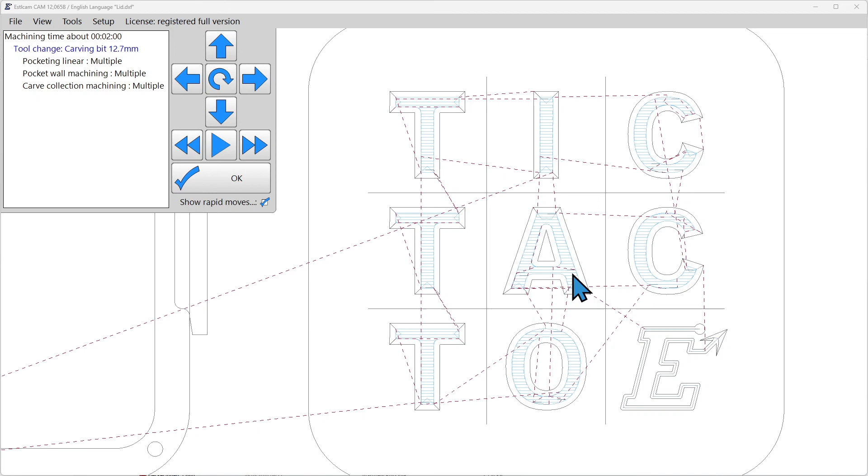If we now go back to the preview, we see that the carves are now never exceeding 2mm depth, and the risk of breaking through the lid is gone. The areas that have been deeper before are now cleared by the tool in a meandering pattern. And the lines of this pocket clearing pattern are currently at a distance of 1mm to each other.

If we machine it this way, the bottom of our letters will have a certain wave pattern. The larger the distance of the lines, the coarser; the lower, the nicer, but at a cost of longer machining time. I want the bottom to be a bit more even and return to the tool's detail view.

The distance of the lines is set in the stepover field. Usually this value is set as percentage of tool diameter, which makes sense for normal pocket clearing. But I want a specific distance of 0.5 mm without having to calculate the percentage value myself. And this works by not just entering 0.5, but 0.5 mm for millimeter instead. And then Estlcam automatically calculates the matching percentage value, which is 3.9% in our case.

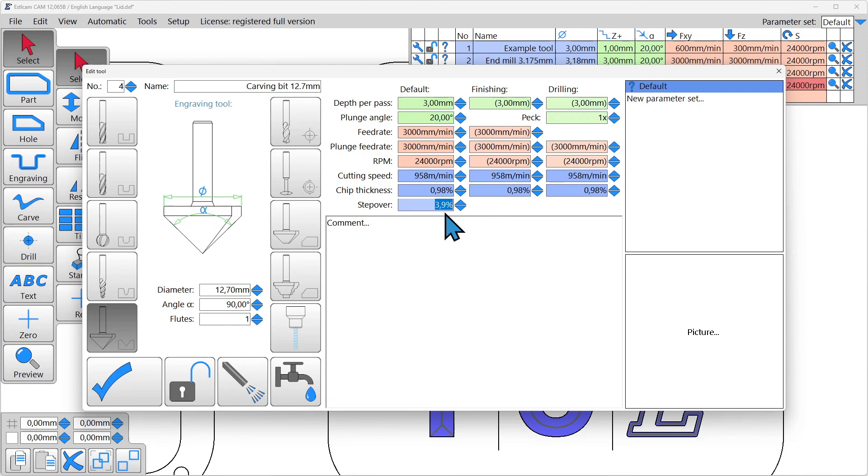This is again one of those things you will usually only learn by having a look at a function's tooltip. But you can also use Estlcam as a calculator, because all number fields support equations. If you enter here 0.5 divided by 12.7 multiplied by 100 and press enter, you get 3.9% again. I just wanted to show this as the calculator function can come in handy sometimes and admittedly isn't described in the tooltips. Okay, back to the preview, and now the pocket clearing moves have a distance of 0.5 mm.

Finally, we have 4 lines left that we create with the engraving function. They first appear crazily thick as the tool has a diameter of 12.7 mm. We select them all while holding Shift key pressed and set a cutting depth of 1 mm. And with this, the line thickness is also adjusted as Estlcam takes the pointy tool shape into consideration, and at 1 mm cutting depth we get this line thickness.

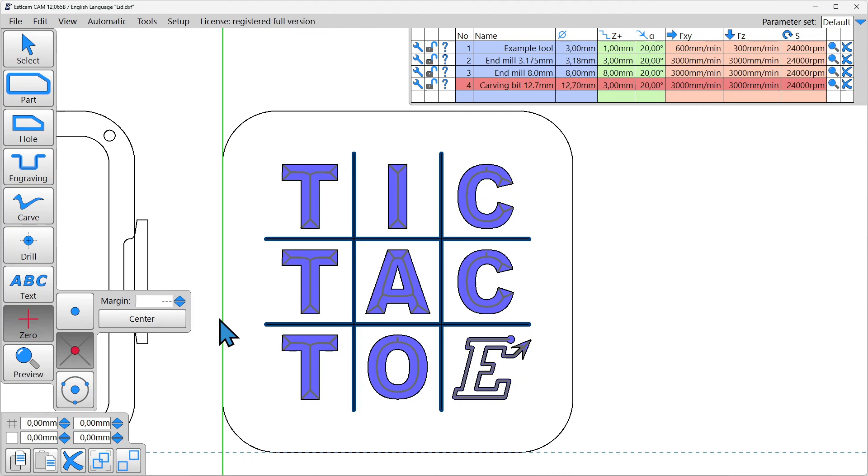Okay, we set workpiece 0 as intersection of the left and front edge again. Save the project as lid outside and create the CNC program. Okay, for the last CNC program, we once more use the corner with angle compensation function. And we again use a strip of paper to zero the Z axis.

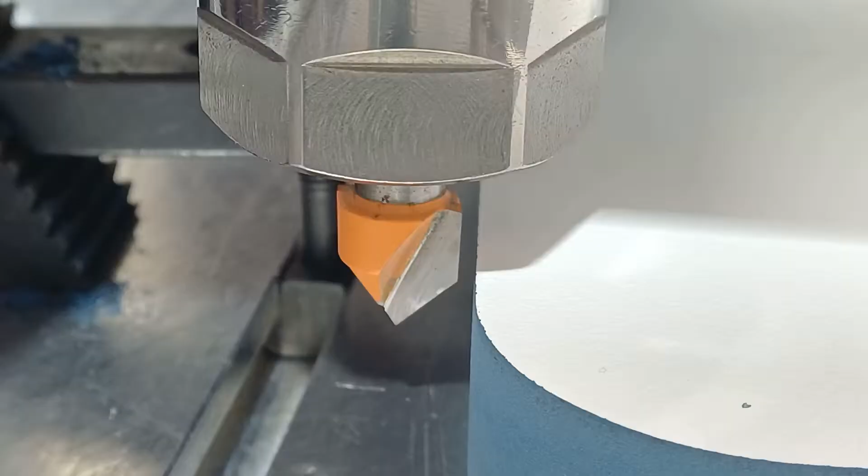But at the edges, we now need to take into consideration that the circumference of this tool is a bit irregular. Depending on how we turn it, the distance to the edge gets more or less. We always need the largest distance and need to turn it so the cutting edge directly faces our workpiece edge. Doing it this way is okay, and we could use the paper strip method, but measuring with the tool running is generally a bit more precise. However, we cannot use the paper strip with the tool running. This would be insanely dangerous.

Instead, I stick solidly black printed labels on the edge, and now we can touch the label with running motor until we notice contact either by a tone change or a white line appearing on the label. And our workpiece will not get scratched. Okay, there are many more methods. For example, automatic electronic contact detection, which is very fast and precise, but this would lead too far for a beginner tutorial.

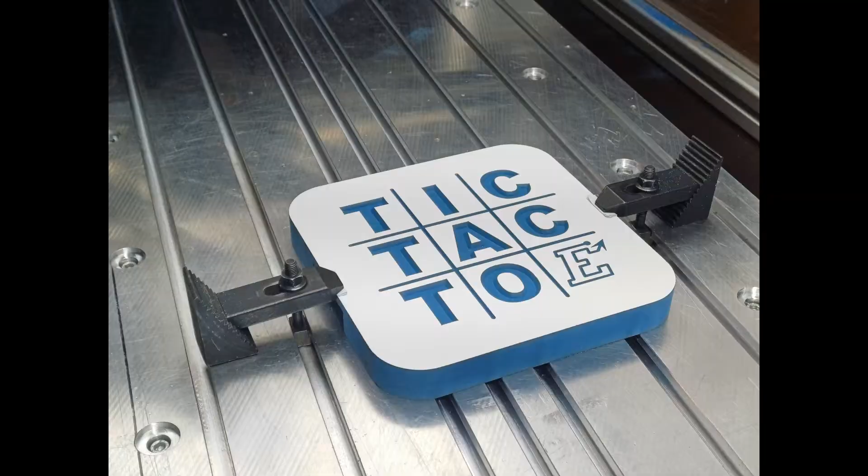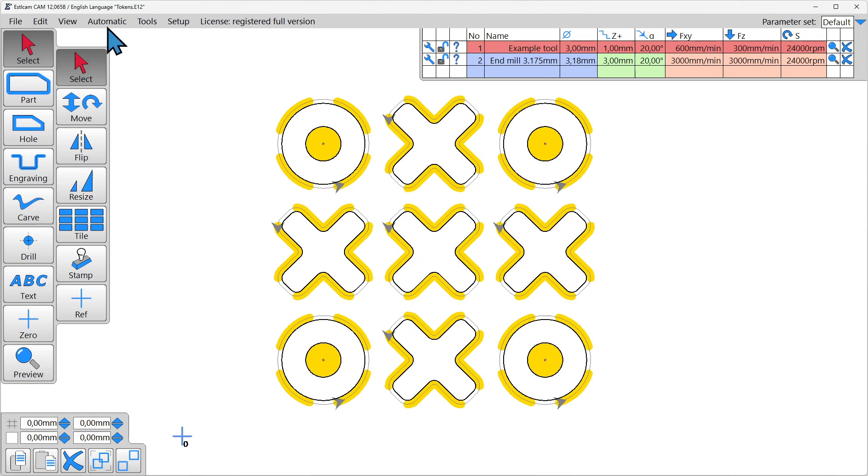At the end, one last thing that often causes confusion. At the moment we have 4 tools in the list. But if we open the first project file with the tokens again, all the tools we created in the meantime are gone. This is intentional. The project files exactly restore the project as it was at the time of saving. This allows to exactly recreate projects at any time without risk of surprises caused by changed tool parameters or missing tools. And if we open the last project file for the lid outside again, all our missing tools reappear.

So, if you change something in the tool list, make sure to also save it in a project file or a standalone tool list using menu Tools, Save, Complete. Okay, this was the Estlcam beginner tutorial. I hope I got a balance between mentioning everything important without going too far into details somewhat right. Have a look at the tooltips, and the best way to learn Estlcam is to just play around and try.